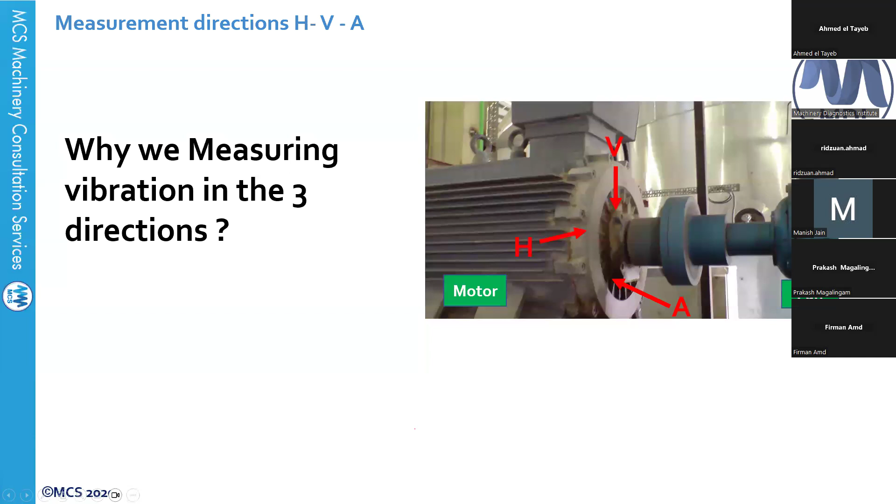I'm living in Australia for almost 12, 13 years now.

I have two companies: one called MCS, Machinery Consultation and Services, which is the company for machinery consultation, and I have 4 guys working with me in the team. I also have another company called MDI, Machinery Diagnostics Institute, which is the company for training.

MDI is a training institute. We are training partners with Mobius Institute, with ICML for lubrication, with Infraspection for thermal imaging, and we have our own turbomachinery courses: turbomachinery analysis, advanced turbomachinery analysis, advanced machinery balancing, and turbomachinery data collection.

This is the course package we are introducing. We plan to make these free workshop sessions to talk about several topics in condition monitoring. We'll start with vibration analysis, one session every month, short but effective.

I'm pretty sure you will like it. We're going to talk about turbomachine vibration analysis, data collection, fault analysis, how to make a vibration analysis report, thermal imaging, oil analysis, on-site balancing, laser alignment, and asset reliability. Many topics over this year, one session every month.

At the end of the session, during the whole session, it will be recorded, so we put it on the YouTube channel so everyone can see it later if they couldn't attend the session.

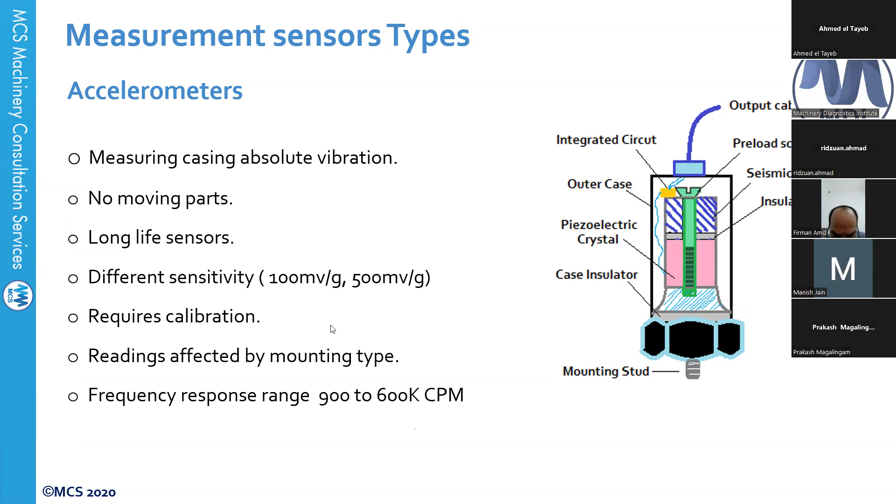Reading of this sensor is affected by mounting type, and we have frequency response between 900 to 600K CPM. Those accelerometers measure high frequency vibration; you can have flat or 2-pole base magnet, single and tri-ax accelerometer. External power is required for the accelerometer, not like the transducer. Temperature is limited to 250 Fahrenheit, and it's easy to attach for routine vibration data collection. Reading can be integrated to velocity and double integrated to displacement.

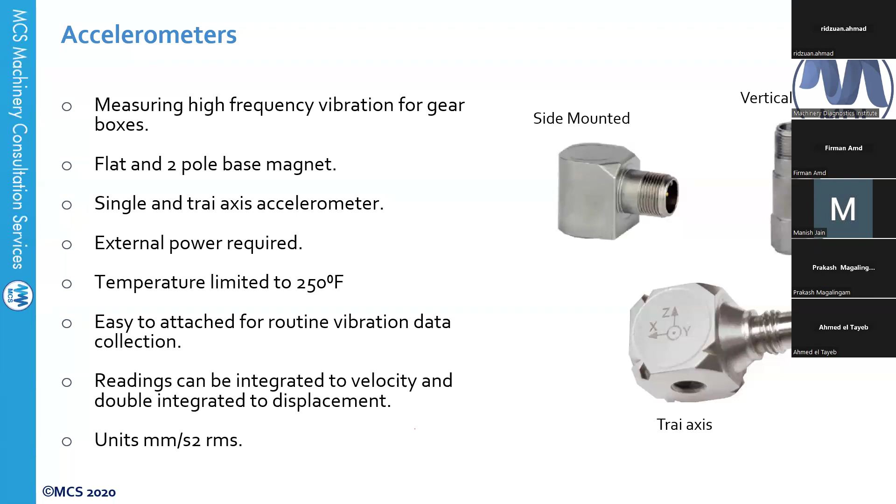We have many mounting methods when we're trying to take vibration data using those accelerometers.

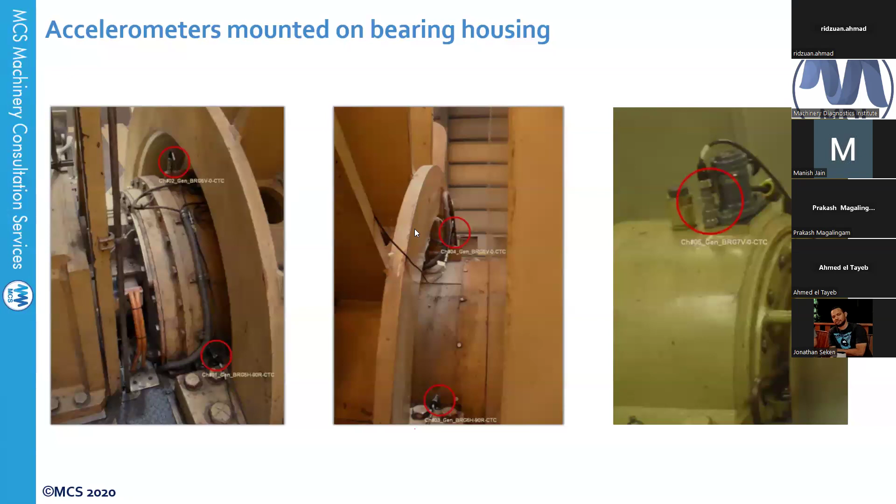So you have here, this is the steam turbine casing, and as you can see, you have the accelerometer on the casing. So you can collect vibration data from the casing of bearings using those accelerometers. You have the velocity transducer. This is the second type of vibration sensors, and this can measure the casing absolute vibration.

It contains moving parts. As you can see, there is a spring and coil and magnet. No external power is required because the movement of the coil inside the magnet by itself will generate the power required to be converted later on from analog to digital reading so you can get the vibration data. It has short lifetime because of the mechanical parts inside the sensor.

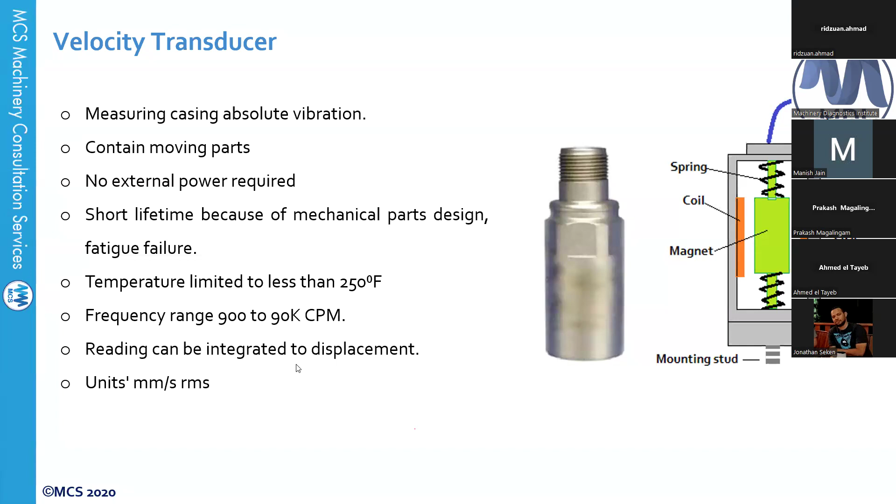Temperature limited to less than 250 Fahrenheit. Frequency response range between 900 to 90,000 CPM. Reading can be integrated to displacement from the velocity. The third type of sensors we have is the proximity probe. Proximity probes, or proximity transducers, or non-contact eddy current.

It uses a radio frequency electromagnetic field to measure the distance between the non-contacting probe tip and the observed target. Measuring shaft position within the clearance of fluid film bearing, you get DC voltage. And measuring the shaft vibration amplitude by AC voltage. So with proximity probe, you get two types of voltage, AC and DC.

DC will tell you the shaft position inside, for example, the journal bearing, or for the axial movement. And the AC will give you the shaft dynamic vibration in microns or mils peak to peak. And mostly it's used in steam turbine, gas turbine, any machine with journal bearing. It doesn't have moving parts.

You have sensor sensitivity about 200 millivolt per mil or 7.87 volt per millimeter. And this is the sensitivity for the sensors especially used in measuring vibration data. Those sensitivities can be different with different sensor types, and you'll have different linear ranges as well. And it can have several applications, like measuring the eccentricity, the speed, and the differential expansion.

So those sensors have different sensitivities with different sizes, with different linear ranges, and can be used in different applications on turbine. But the most common one we're talking about is the 200 millivolt per mil or 7.87 volt per millimeter. This is the one which is used in radial vibration data collection.

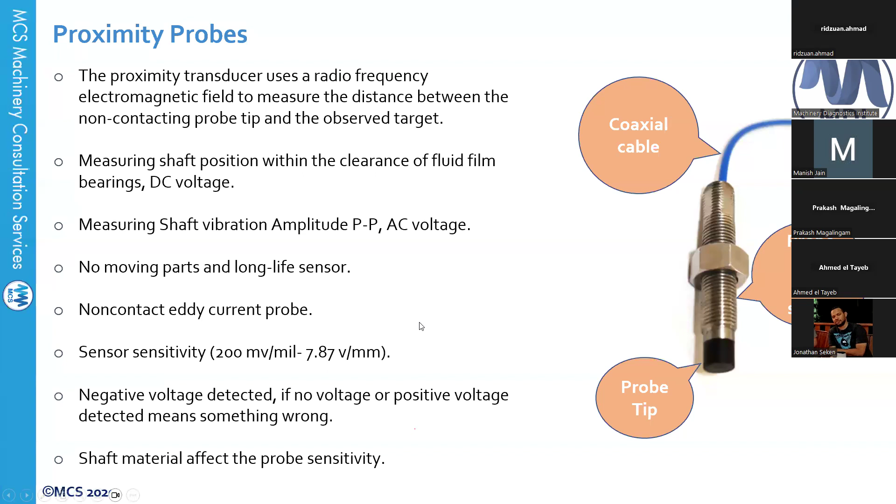If you get negative voltage detected, this is the normal voltage you can detect from the proximity probes. If no voltage or positive voltage, this will mean there is something wrong, and shaft material will affect the probe sensitivity. As I mentioned, those proximity probes will give you DC and AC voltage data, and the DC voltage is directly proportional to the gap or the distance between the probe tip and the shaft surface.

When you have larger distance between the probe tip and the shaft surface, this means you have lower voltage value. And when the shaft is closer, with a smaller gap, this means you have higher voltage value. So if you look here from this plot, you have 2, 4, 6, 8, 10, 12.

This is the voltage value. Remember that the output voltage value was minus DC. So which number is bigger, minus 2 or minus 24? Definitely minus 2 is larger than minus 24. So when you have minus 2, this means you have larger voltage value and the gap is smaller. When you have lower voltage value, this means you have higher gap.

And this is almost the midpoint here, around 10, the midpoint of the linear range. The linear range for proximity probe at 7.87 volt per millimeter as sensitivity is between minus 2 to minus 18, minus 20. That's why when you gap the proximity probe, you put it around between minus 8 to minus 10 or minus 11. This is the midpoint of the linear range. So you can ensure that when the shaft is moving away from the probe or near to the probe, you will still be in the linear range of the proximity probe.

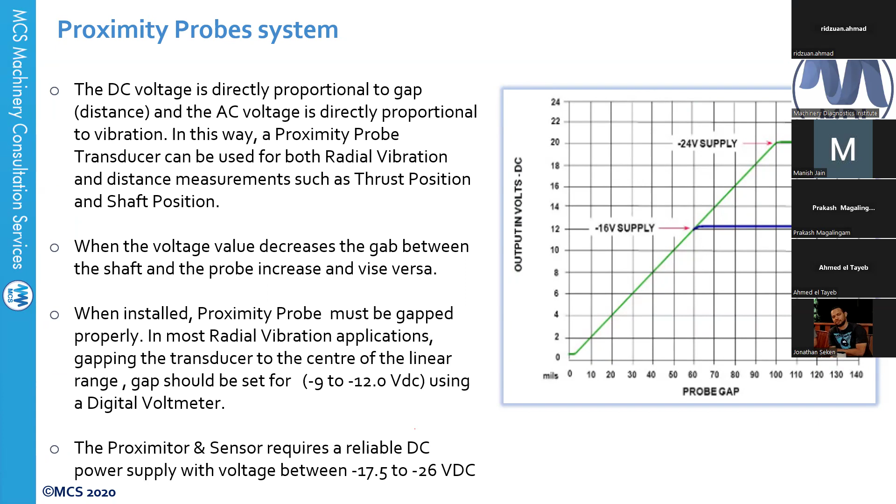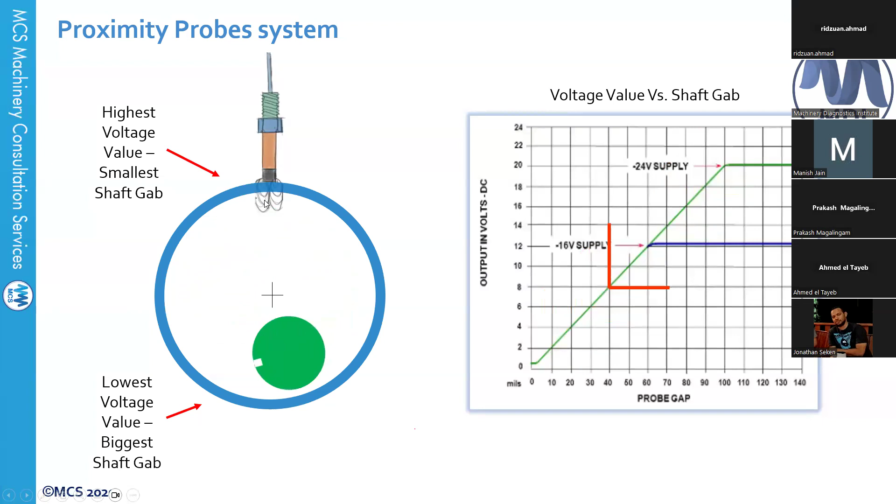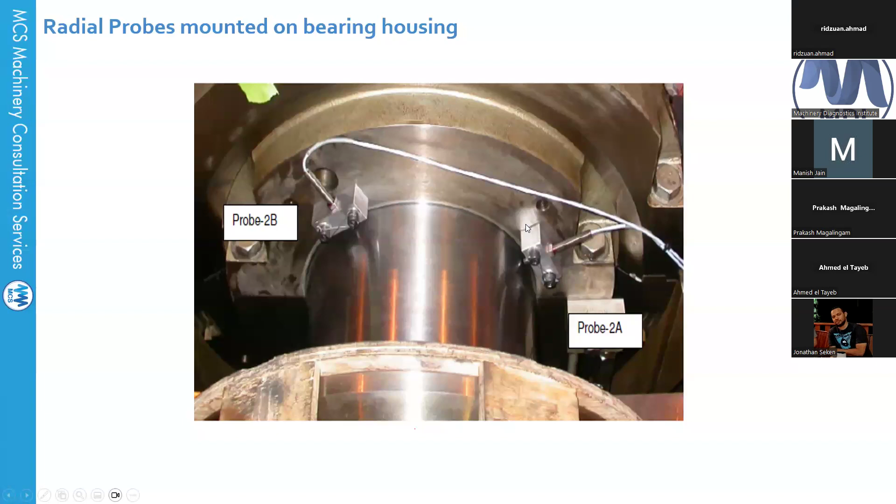As you can see here, when the rotor starts to be away from the proximity probe, you will get the lowest voltage value and the biggest shaft gap. And here you will get the highest voltage value and the smallest shaft gap. This is proximity probes, and this is what we call internal mounting. There are two types of mounting: internal mounting and external mounting. These two proximity probes are mounted internally over the shaft for a steam turbine.

Prior to talking about vibration measurement, we need to understand why we are going to measure, what we are going to measure, and how we are going to measure it. Why? What information we are trying to find, what the appropriate data acquisition parameters are, what sensor we use, how do we mount it, where do we mount it, and why we collect vibration data in horizontal, vertical, and axial.

Many times in the training courses I'm delivering, I ask what is the reason we're measuring horizontal, vertical, axial? And I get the answer: because when you measure in horizontal, vertical and axial, you will be able to detect different types of faults. Some faults we see in horizontal, some in vertical, some faults will appear with higher level or more dominance in this direction. But this is not the right answer. We're not measuring in 3 directions because different faults appear in different directions.

The reason we're measuring in different directions on the machine is because the machine response is different between horizontal, vertical and axial, because the stiffness is different between horizontal, vertical and axial. That's why we have imbalance with higher amplitude in the horizontal direction for most machines, because the response we get in the horizontal direction is higher than what we get from the vertical direction. Why is that? Because the stiffness is equal to the load per unit deflection.

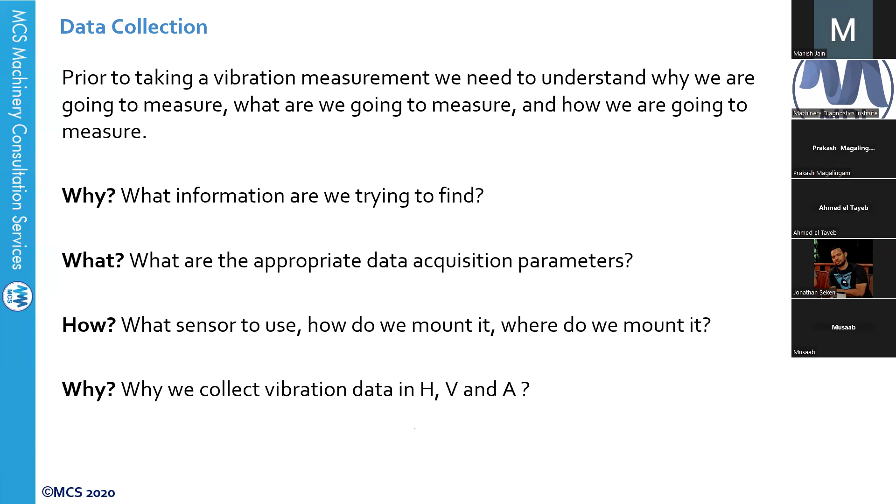So if you say, I have a vibration problem in bearing number 2, if I don't know that bearing number 2 is the drive end bearing of the motor, I will not be able to understand the problem. You can use this method, but you must put the machine photo. I don't like to use it because it's not easy. Every time you use it in any report, you will have to put a photo and mark all the points. That's more work to reach this result.

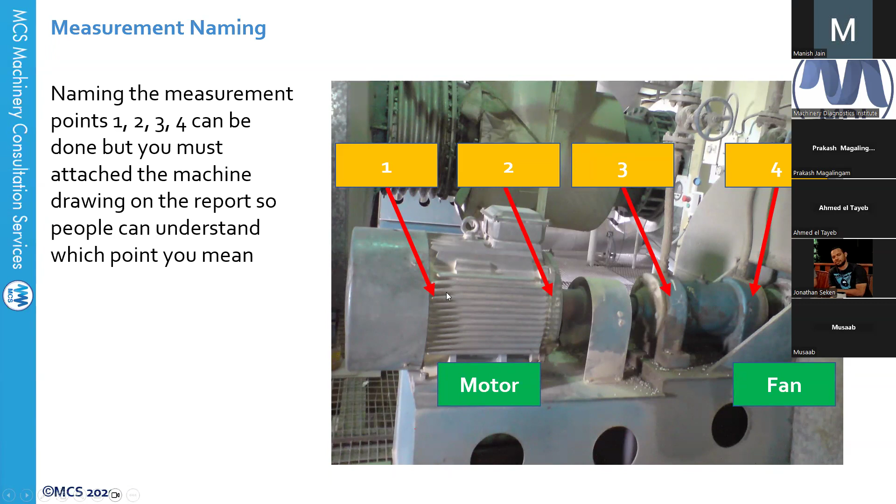However, you can name it MNDE or MDE, FDE or FNDE: motor non-drive end, motor drive end, fan drive end, and fan non-drive end. So this is a fan. You have the motor, coupling, and 2 bearings for the fan. This is the motor drive end. So if I told you there is a bearing fault in the motor drive end, you'll understand that I'm talking about this bearing.

But if I told you bearing number 2, bearing number 3 without a drawing, you will not understand what I mean. So you can name it motor non-drive end, motor drive end, fan drive end, and fan non-drive end. This is the motor and this is your fan.

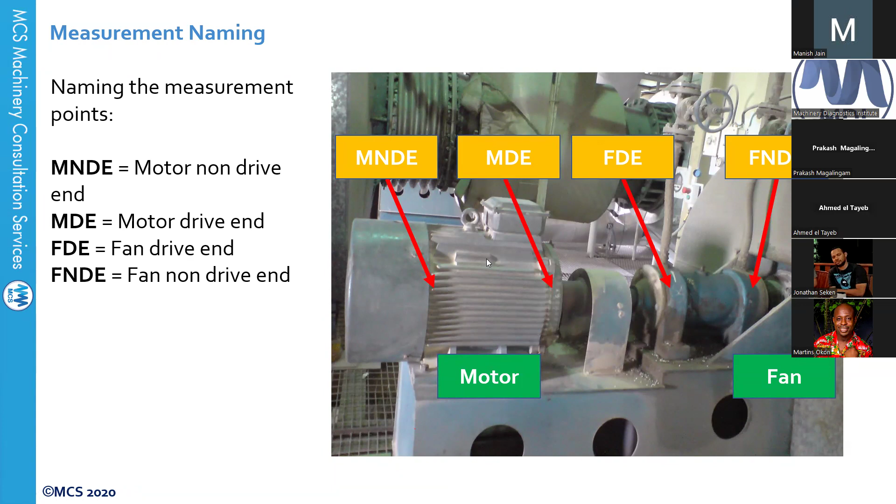You can also name it another way: motor outboard bearing, motor inboard bearing, fan inboard bearing, or fan outboard bearing. So this is also a good terminology to name your machine with. And this will enable you to understand. If I told you there is a problem in the drive end or the non-drive end, you will understand what I'm talking about.

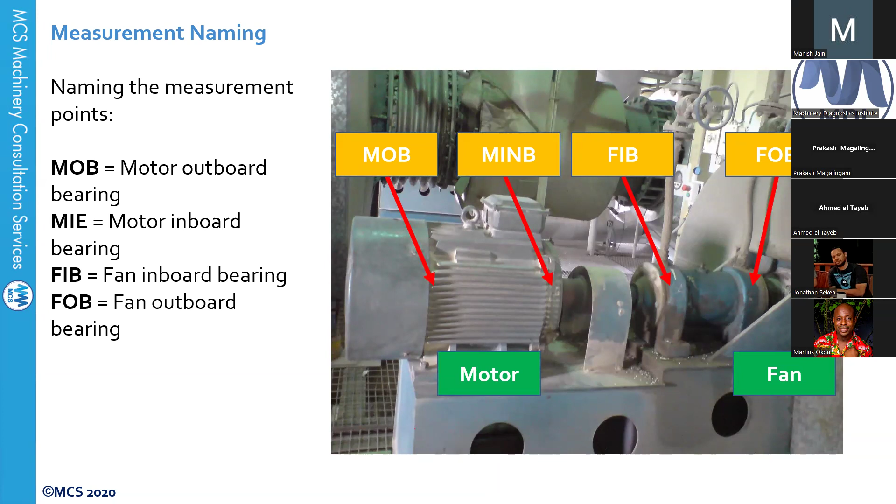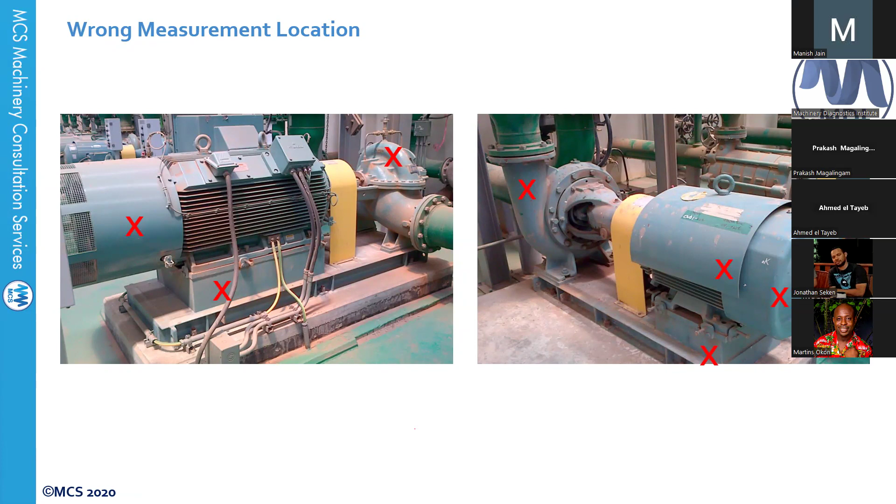Okay. So for the point of measurement, you cannot just measure at any location. If you measure here on the cooling fan casing, that will give you a false reading. It is hollow from inside. You cannot measure on the base. You cannot measure on the casing of the pump or the volute. You cannot measure on this cover from rain. You cannot measure on the cooling fan cover. You cannot measure on the base.

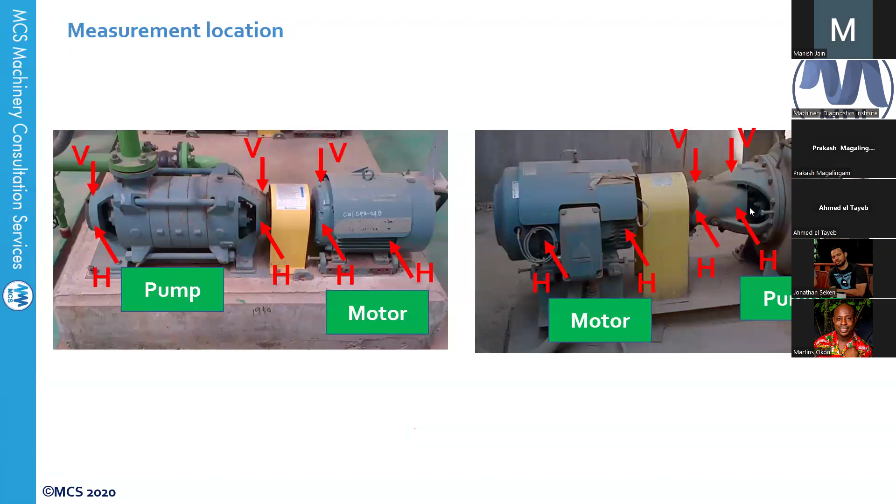Where to measure? If you have a motor and pump, this is the best point. Horizontal, vertical; you don't have an axial axis here. Horizontal, vertical; you don't have axial here. Horizontal, vertical; yes, you can get axial on that one. Horizontal for the non-drive end and drive end, and 2 horizontal and vertical for the pump. If you can put your sensor on the motor feet here, you can take some reading. Sometimes if you have a side exit, you can put it here, but be careful if there are any rotating parts.

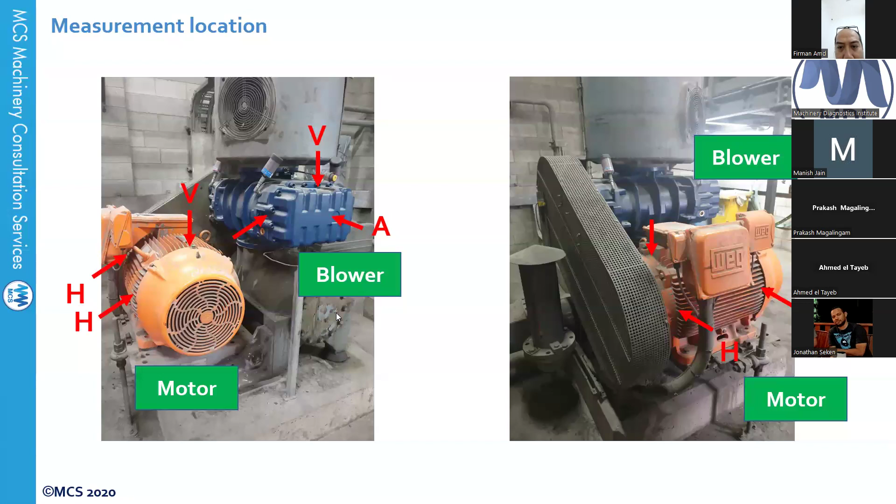So this is something you can take. For a vertical machine, horizontal and vertical is not clear. This is your horizontal direction, vertical direction, horizontal and vertical. If you choose to keep this one horizontal, keep it horizontal every time you take the measurement. And if you choose this direction to be your vertical, keep it vertical every time you take the measurement.

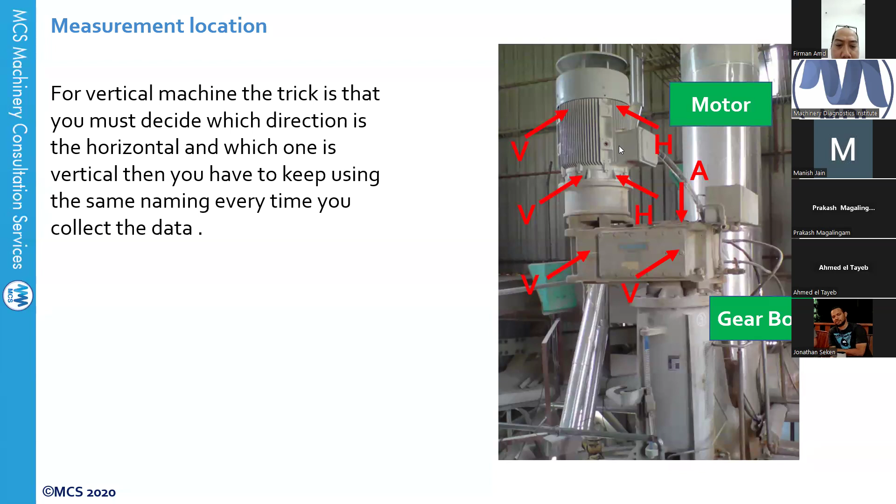You cannot swap them. You cannot measure here this time and name it in your software horizontal and this one name it vertical. If you keep this direction of measurement horizontal, keep it like this. You can even mark it. You can put mounting pads, and these mounting pads have the direction stamped on them, so you will not get confused. As you can see here, this is a couple of pumps.

I tried to put many types of machines so I can give you the feeling you have on site. Like horizontal, vertical, horizontal, vertical. If you have a side exit sensor and you can squeeze this one to put it somewhere here, that's not bad, it can be done. If you can have a side exit sensor to squeeze it here for axial, that's not bad. If you have side exit to put it here to get your axial, okay, better than nothing. And you see, get your axial, horizontal, vertical. If you can squeeze something here, okay, that's fine. So you can get this measurement.

As you can see here also, horizontal, vertical direction, this is your axial, horizontal, vertical, this is for the pump. This is a motor, direct coupled with a small gearbox, coupling, and this is a hydraulic pump. With this small motor, you can take horizontal, vertical for the non-drive end, horizontal and vertical for the drive end. However, because this motor is small, you don't need to take measurements for both bearings. One measurement would be enough, because the motor size is too small. If you have a small motor, you don't need to take readings in the non-drive end and the drive end.

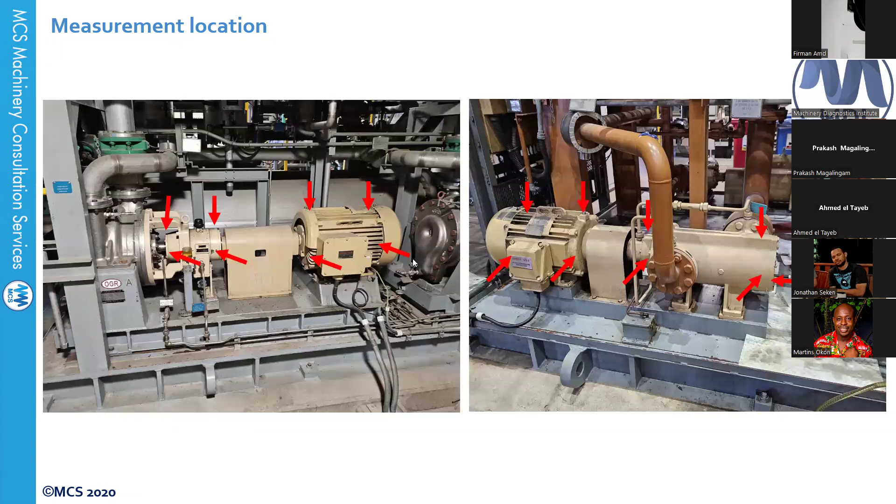However, by small motor, we're not talking about small by kilowatt, we're talking about small by distance. Like if the total length of the motor is less than 70 centimeters, like this one, one measurement would be fine. But if it is a long motor, like for example that one, this is a longer one, you need to take the non-drive end and the drive end. It's not about how many kilowatts the motor is, it's about how long it is.

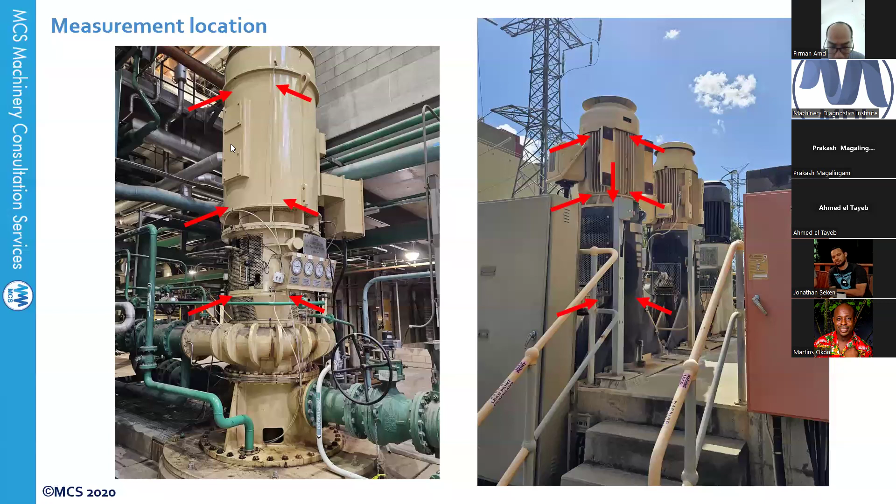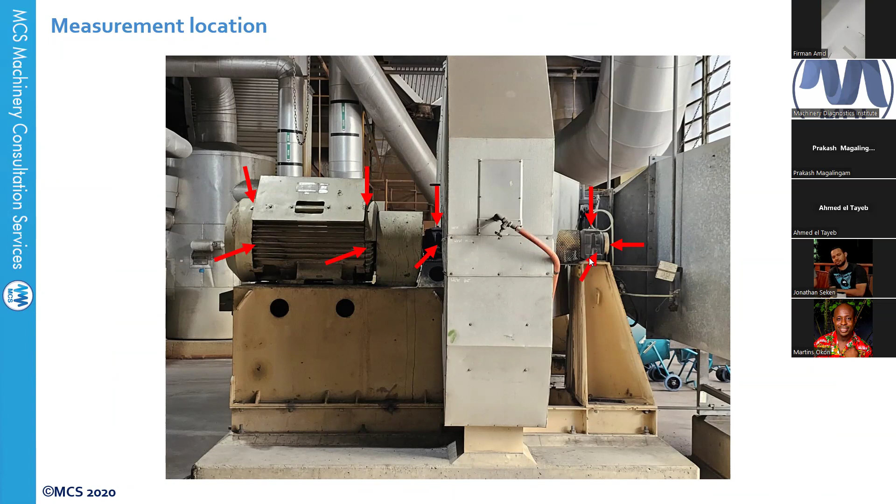So if we choose this as your horizontal and this as the vertical, keep them horizontal and vertical every time. As you see, with this motor, you cannot take only the middle, for example, because this is a long motor. It has a longer length, so you need to take in the non-drive end and in the drive end. This is the fan drive end, and this is the fan non-drive end, and this is a center hung fan. Again, with this one, horizontal, vertical, horizontal, vertical. If I don't have access here for axial measurement, I will not be able to take it.

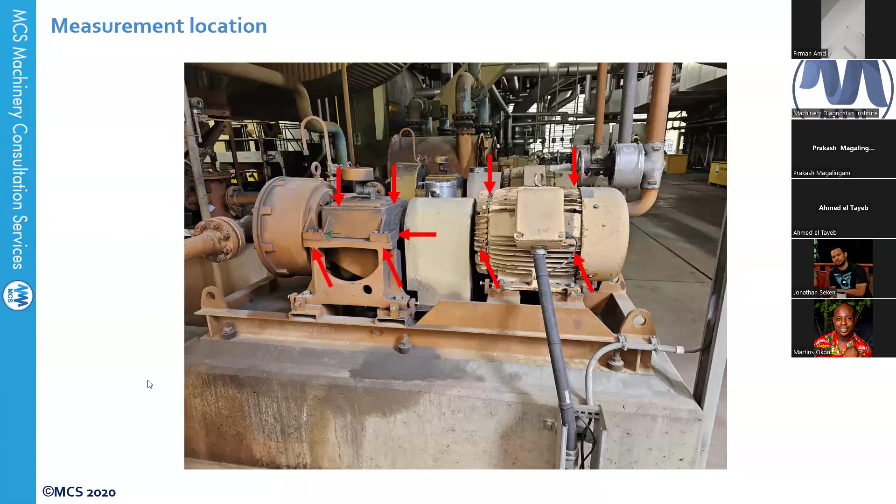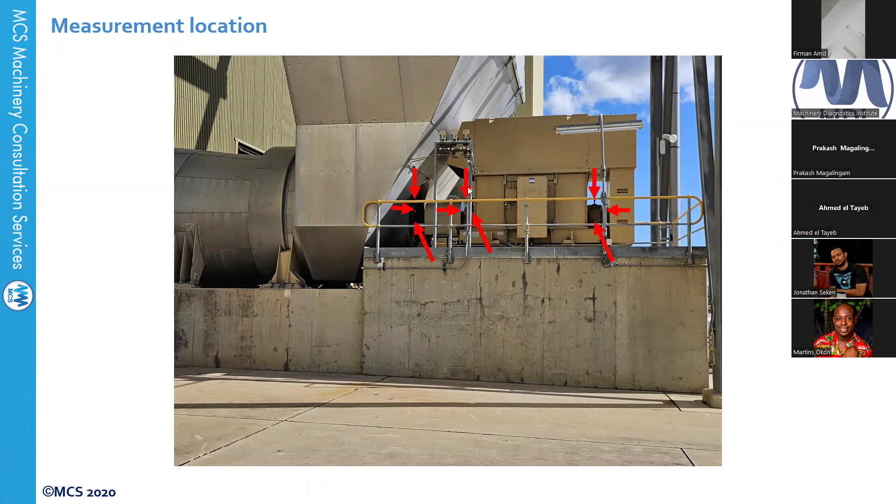Again, you will take the measurement in the 3 directions. With this pump, you can take the axial from here. It will not be bad. It gives you an indication, better than nothing. And this is your drive end.

How do you determine the best vibration monitoring interval so as not to miss catching potential issues early to initiate maintenance? Very good question, Martins, but this is not about this lecture. This is the last one about asset reliability.

But the short and easy answer is that you must do a criticality risk assessment. Based on the criticality risk assessment for your equipment, you will be able to choose the frequency of the measurement: how this equipment will affect the plant, the production, the environment, the human factor, the breakdown, the secondary damage, the spare parts or inventory you have. There are many factors, and then you can rank this with numbers.

And if it gives you a high number, for example, I'm trying to explain it quickly, a high ranking value, then it must have a shorter interval for the measurement. But if it doesn't have an effect on the environment or the production, has less effect on the spare parts, it's a small motor, not expensive, in some cases you can just run it to failure, because it's not worth wasting your time taking measurements on this machine.

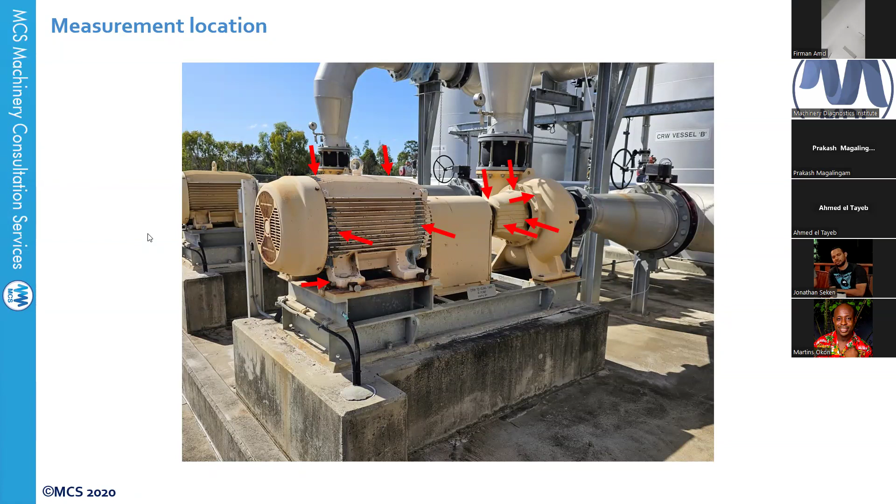As you can see here, horizontal, vertical, horizontal, vertical. Some motors, by the way, are not made of steel. Your magnet will not be able to stick to the casing. So what you do is hold it with your hand, as strongly as you can. Don't make things very complex. Don't say, okay, the sensor is not sticking, the magnet's not sticking. Just hold it strongly with your hand.

And what else to do? Try to get mounting pads and stick them with glue or adhesive or two-part material onto your motor. Then on the next measurement, you will be able to get good and reliable vibration data. And the most important thing is the repeatability and consistency of the measurement.

In case a vibration sensor is faulty, what other protection can help trip the machine to prevent a breakdown? If the vibration sensor is faulty, you cannot run the machine with it. It must be replaced. Especially if you have steam turbines, gas turbines or high-speed machines running with proximity probes and they are faulty, it's not safe at all to run without a vibration protection system. You need to have a protection system for this machine.

I once went to collect some vibration data on an old steam turbine. It didn't have proximity probes and it didn't have a protection system. They had one guy with a vibration data collector who collected vibration data on this turbine from time to time, only from the casing. And we got severe damage on this machine. Then I went to the site and installed a proper proximity probe system for the turbine, connected to a junction box so we can take the data from BNC, and we put in a protection system connected to the DCS so we can trend.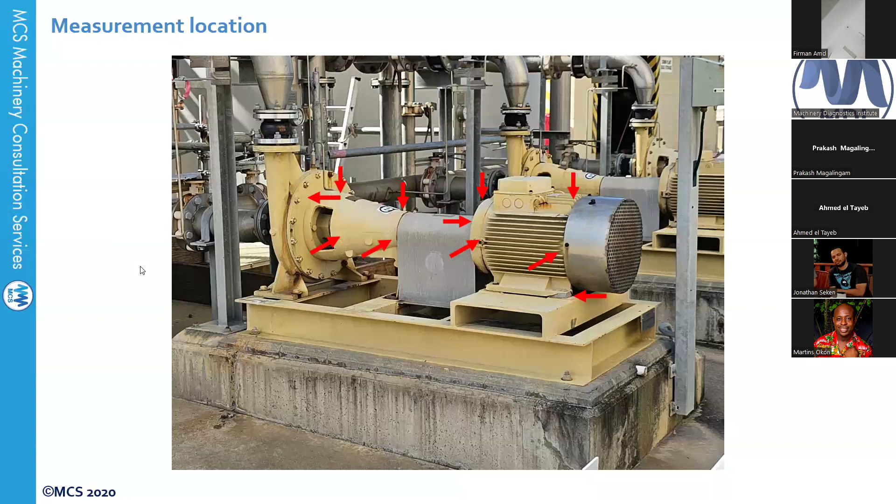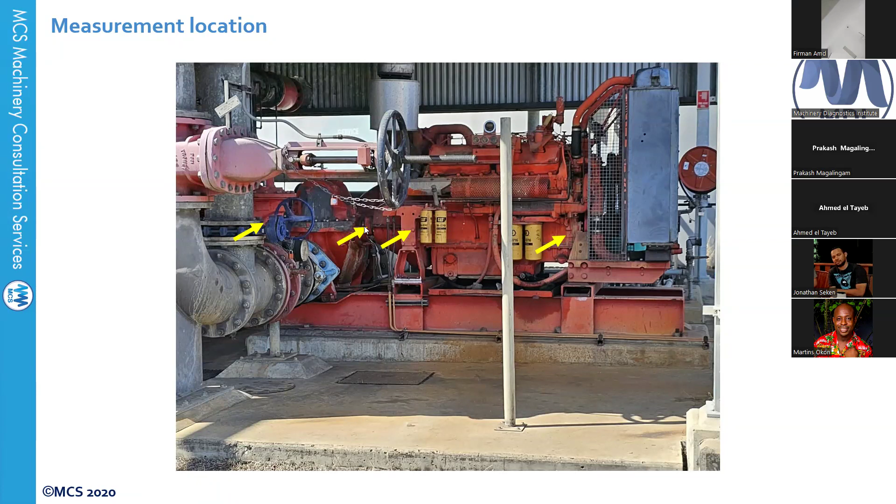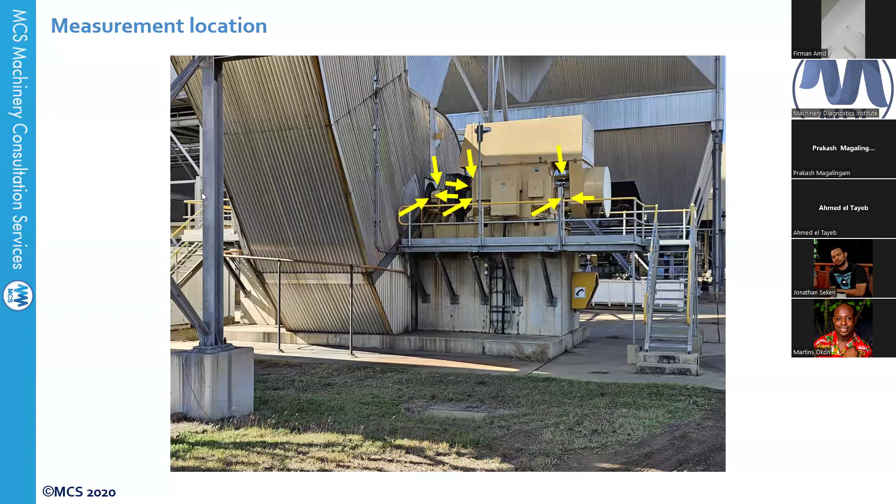So there is no middle answer for these situations. You must have a good protection system for your machine. You cannot say I will depend only on temperature. No. For diesel engines, like this diesel engine for a firefighting pump, you can do the measurement in this direction, and this is the pump: horizontal, horizontal, vertical, and vertical. This is an ID fan. You have the motor non-drive end, motor drive end, the fan drive end, and the fan non-drive end from the other side, and we will take vibration in the 3 directions.

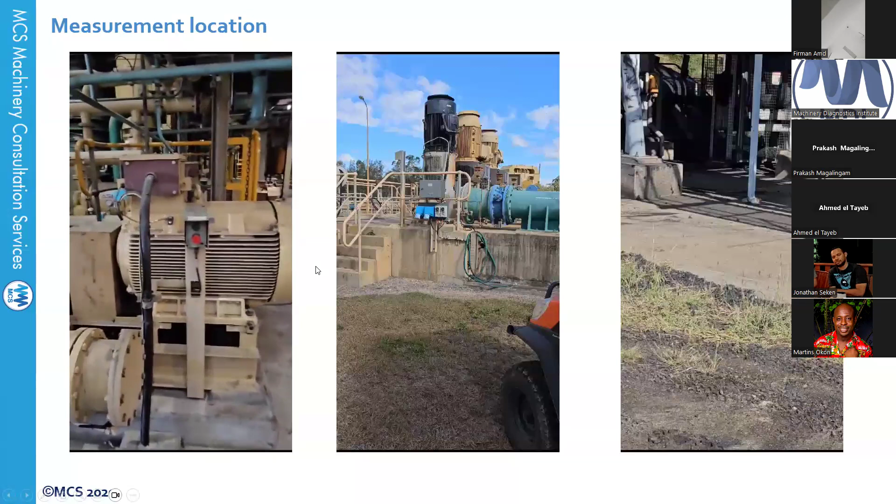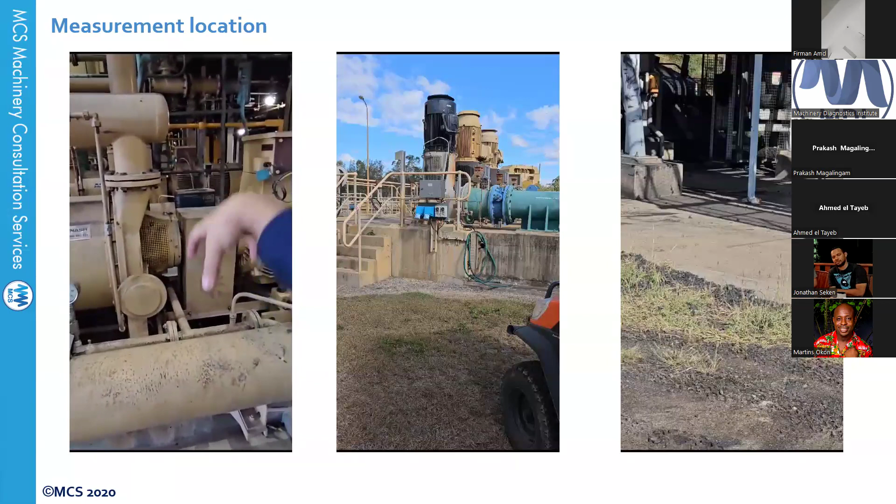Let's have a look at that one. This is a motor driving an air extraction pump. With this video, I will show you how to take the vibration measurement. This is the non-drive end side of the motor, and this is the drive end side of the motor. This is the pump drive end, and the other one is the pump non-drive end, and this is your coupling. Do we need 3 sensors for triaxial? No, just one sensor, which we call a triax accelerometer.

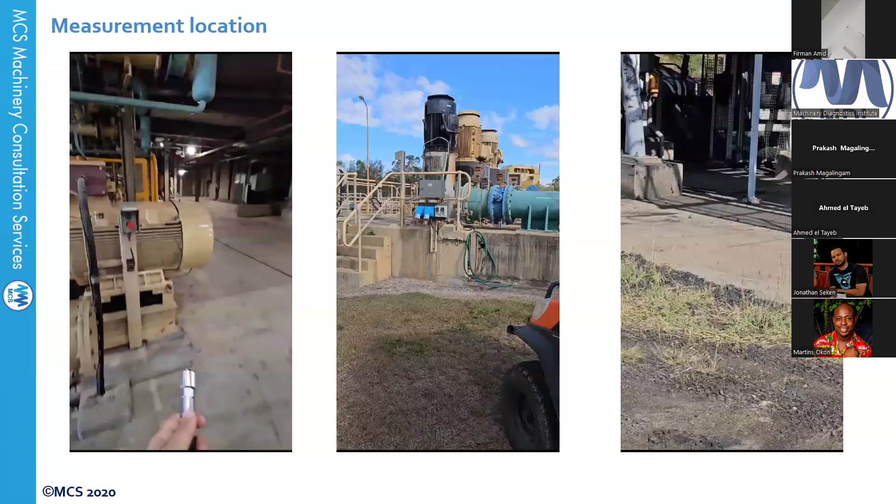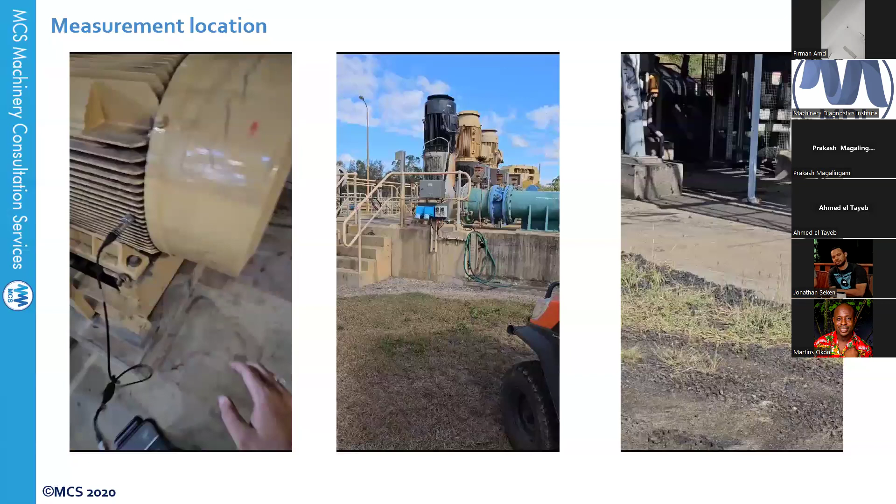So here you have your vibration sensor, and you go to the machine. You put the sensor with the magnet on the non-drive end, and then you open your analyzer. You find the route for the machine you're going to measure. You will have different routes in your data collector. You check the machine name to make sure you're measuring the right machine. You check if the machine is running or not. I checked from the back, this machine is not running, so I will not take a measurement for this one, and I will go to the next one.

And when you put the sensor on, try to put it on gently. The first time I put it on a bit hard, that's wrong. Try to roll it on and place it carefully so you will not cause damage to your sensor, and you will not have a ski slope in the measurement.

You will choose the machine, and then you will start to collect the vibration data. You will see, for example, the last survey, what was the vibration levels on the last measurement taken. You will click enter and start to collect the vibration data. Let's have a look, and then you will say overwrite the last one. I will tell him, for example, okay.

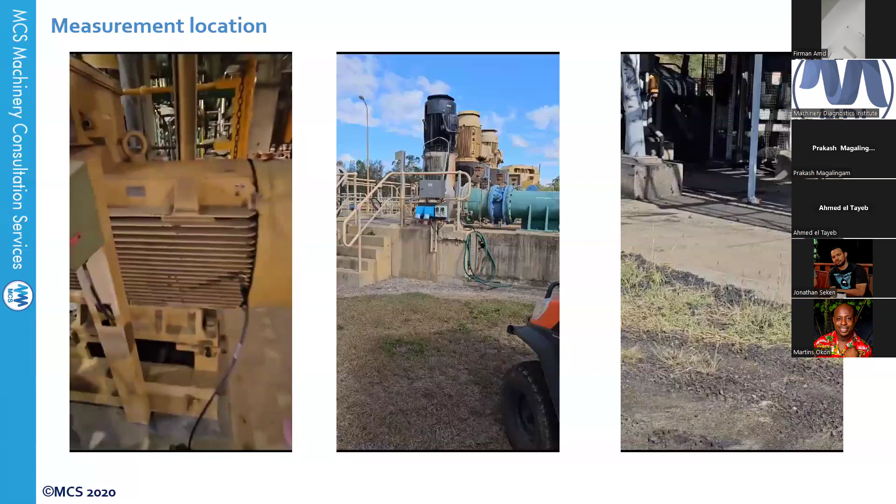Then it will start to acquire the vibration data, and it will be recorded. I take the horizontal measurement, and after it's been collected, we will go for the next direction. It can go automatically, or you can change this by hand. Then you go for, this is, for example, the axial, or you can take it from here.

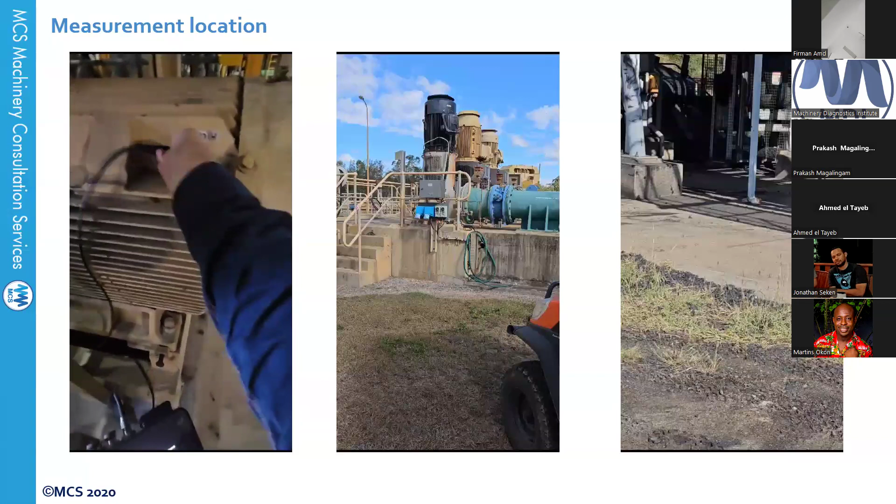This will be your axial measurement, or you can take it from here. If you don't have a good axial direction, try to find the best or easiest solution. Don't say no, I will not take it. At least you get some indication. And now we get the axial measurement. Don't say I don't have a measurement direction. No, you try to take the measurement if you can.

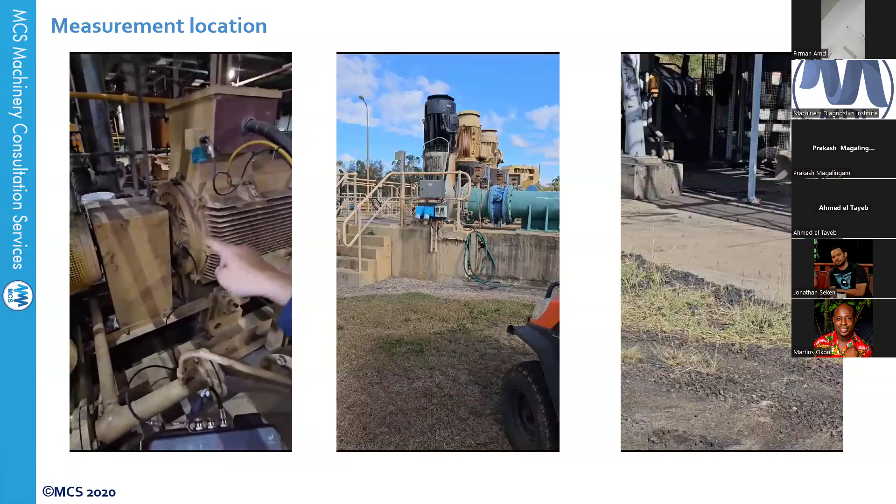And then you see here, when I put it, I roll it on, like I put the side of the magnet pole first, and then I roll it onto the next pole. As you can see here, this is the measurement for the drive end of the motor. You will collect the data.

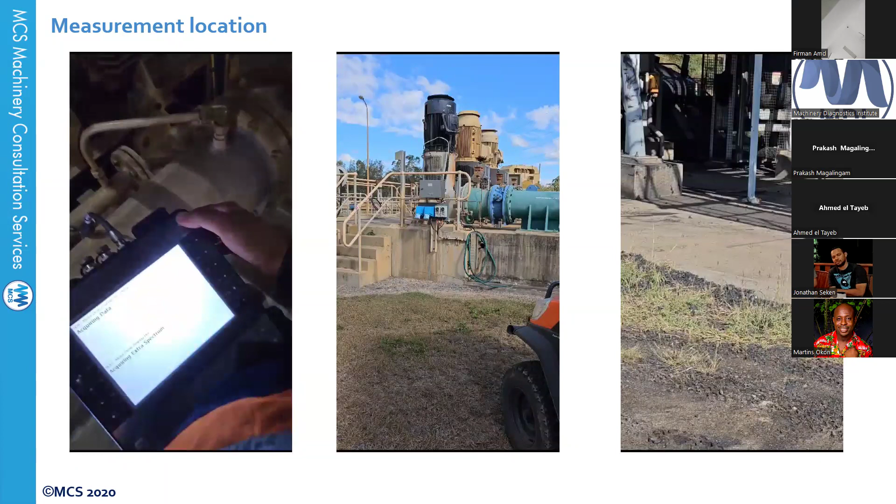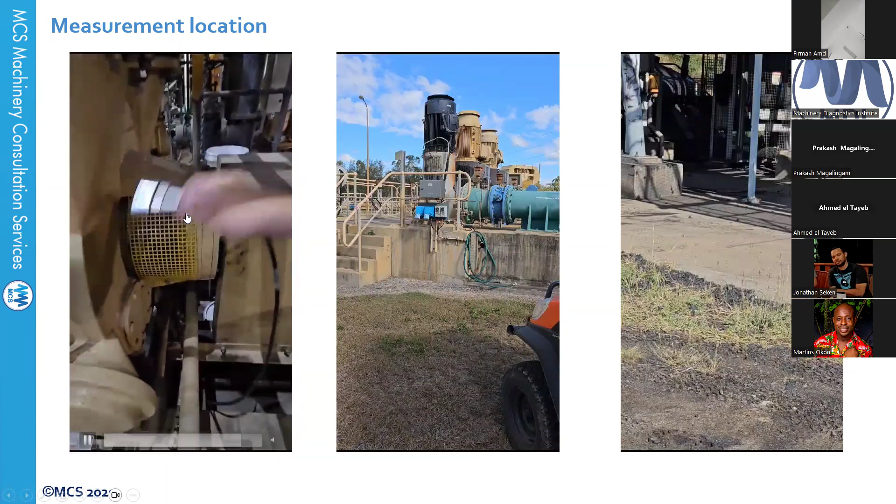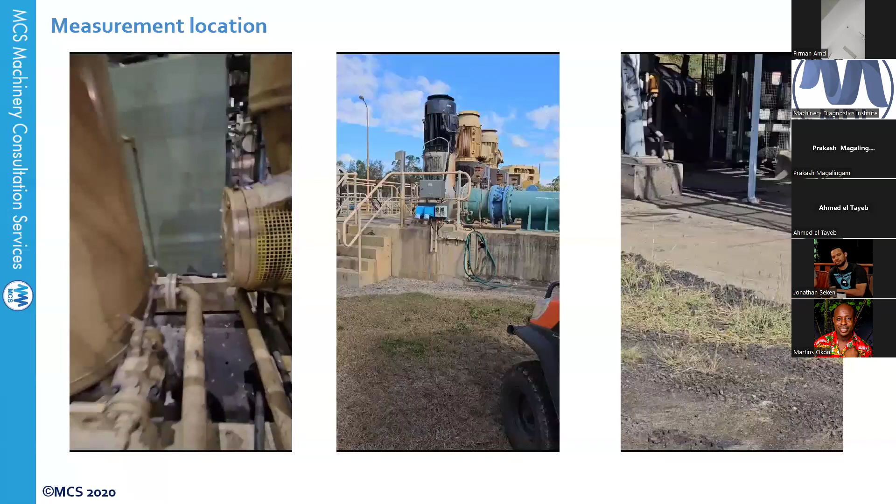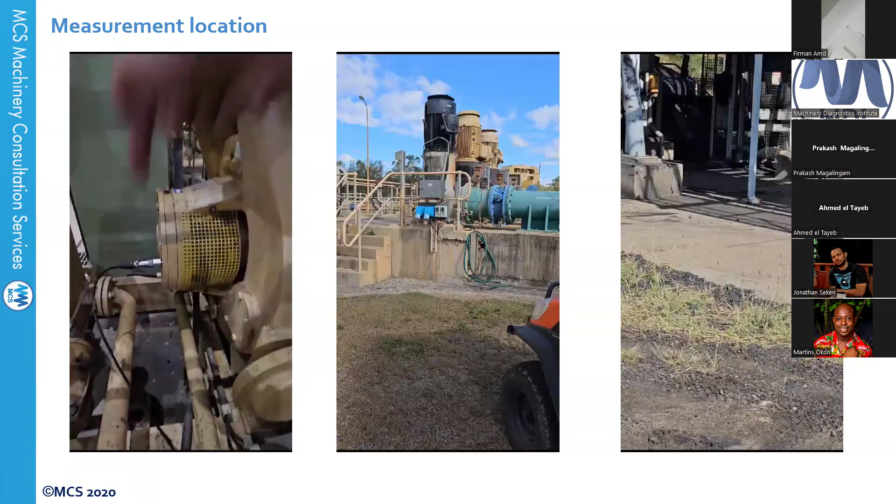Then you will get horizontal, vertical. Here I don't have axial, you see, so I will not take an axial measurement on this side. Then I'll go for the next one, take the horizontal measurement, and if I can have the vertical, I will take the vertical measurement, and again I will roll it on. As you can see, this is a curved surface, and because it's a curved surface, you see horizontal, vertical, and axial, so I will take 3 measurements.

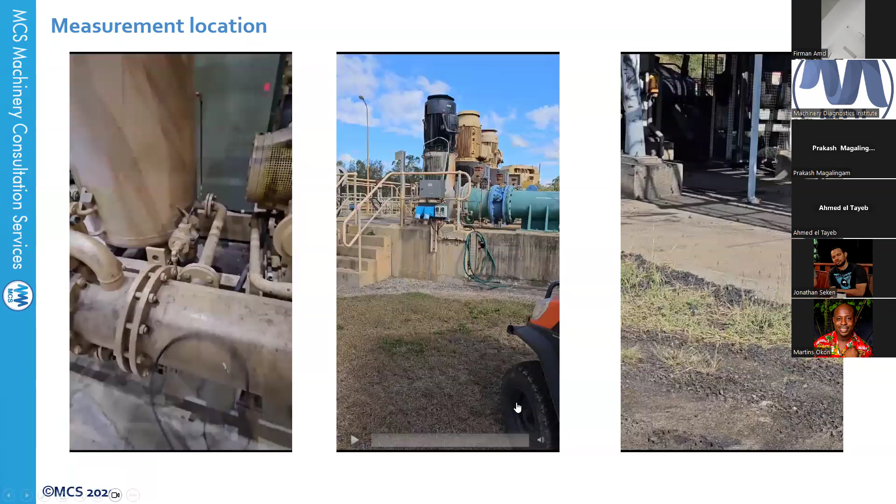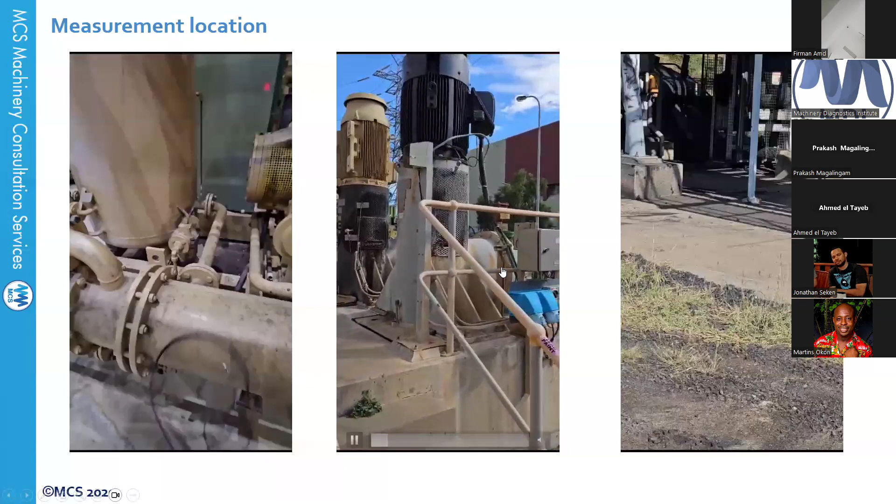Let's have a look here. This is for vertical machines. As you see, this is the line of the flow. So we can say that this here is your horizontal direction, which is the direction with the flow. And we will name this in our software or database as the horizontal direction.

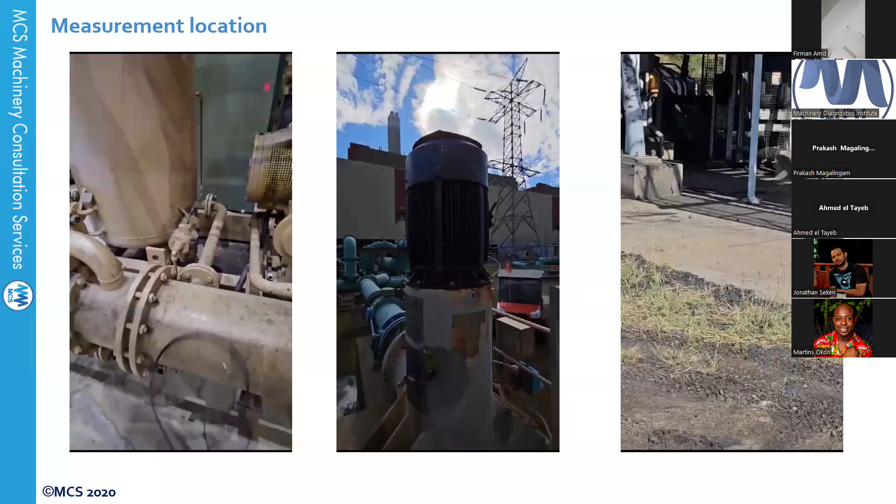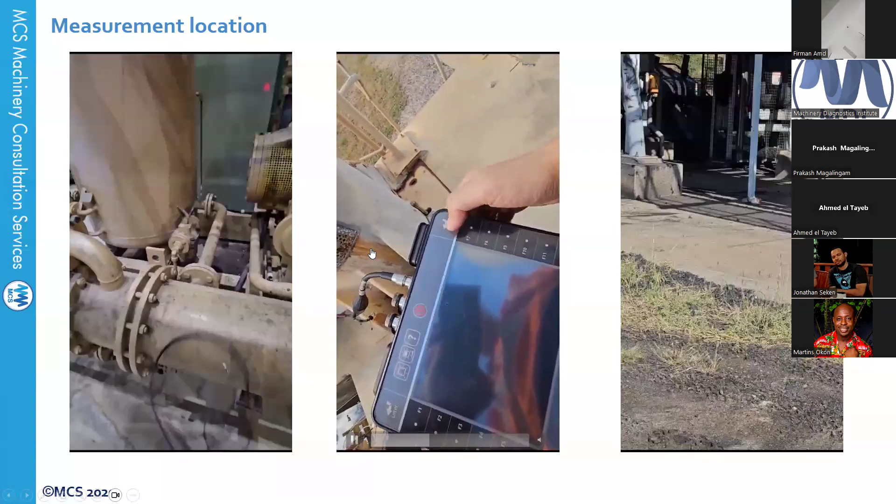So with these vertical machines, you see, we can say this is the vertical because it's 90 degrees perpendicular to the direction of the flow on the pipes. So this will be your vertical direction. And this one will be your horizontal direction because it's in line with the pipe. So you can name it this way.

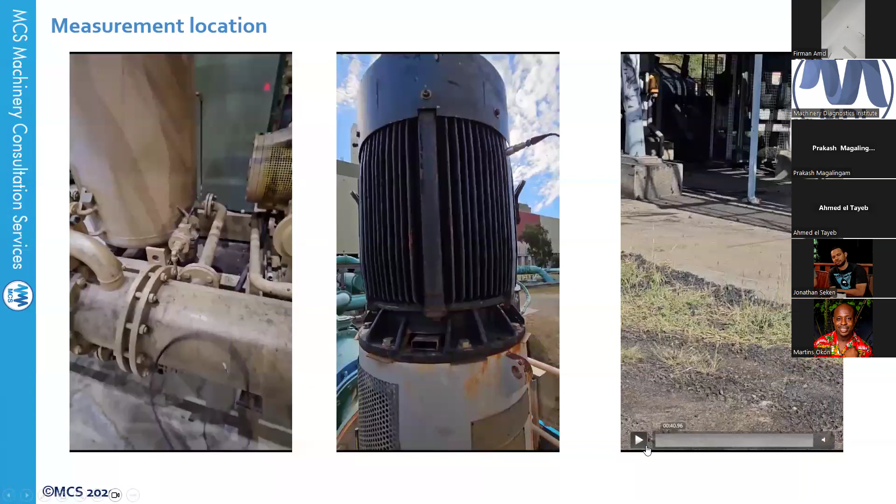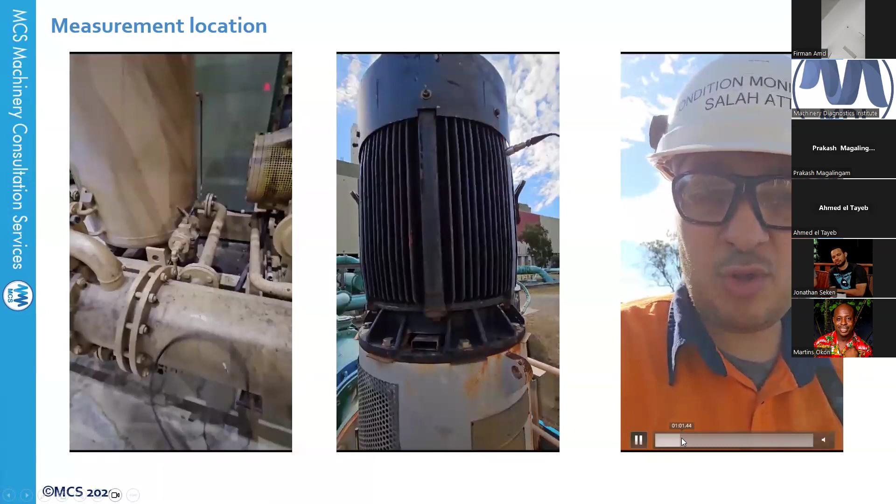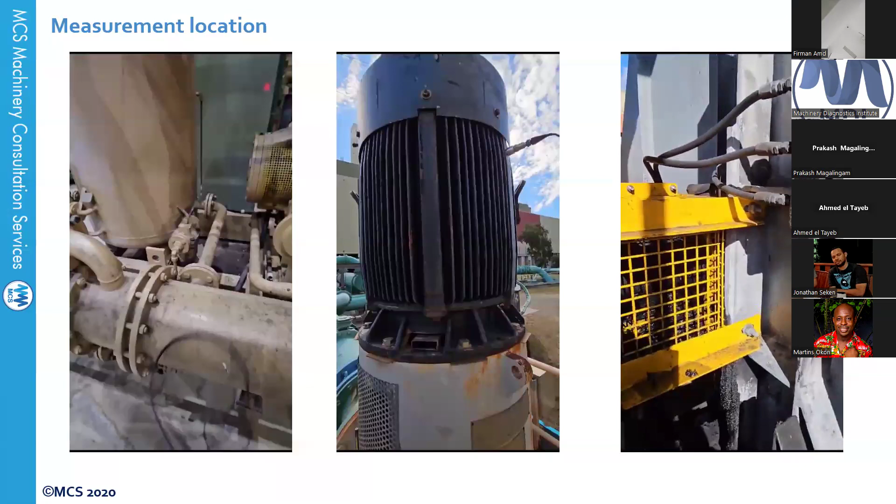And here, if you're going to take some measurement, for example, on motor and gearbox. Yep, this is your motor. And you have the coupling here, and you have the gearbox. So we'd like to take vibration measurement on that one. The motor, we know it, and the gearbox, you need to, of course, be careful about the rotating parts and the guards. This is the conveyor to transfer coal in a power station, and this is again the motor coupling.

So this is your vertical. You see, I put it over the fence. Sometimes the sensor will be a bit loose. If it is loose, try to hold it with your hand. The best way is if you have a mounting pad already stuck to the machine casing, but if you don't have one, don't say I will not measure it. I don't have axial - at least I will take some indication from here. This will be the horizontal for the drive end. It will give you some indication. And this will be your vertical direction.

Okay, if you don't have an axial direction here, sometimes you can put the sensor like this. If you don't have a way at all, you put the sensor by the side. This will give you a reading, here, this one in the middle. At least you get something.

Okay, but you need to always, when you take some vibration measurement, have a notebook with you. You can write if there is a leak, if there is noise, if there is high temperature, if the axial or some measurement has been taken with a special way.

Now you go for the gearbox. You can get the drive end in the horizontal direction from here. And then you have the low speed, the intermediate, the output, and you can name all those points here.

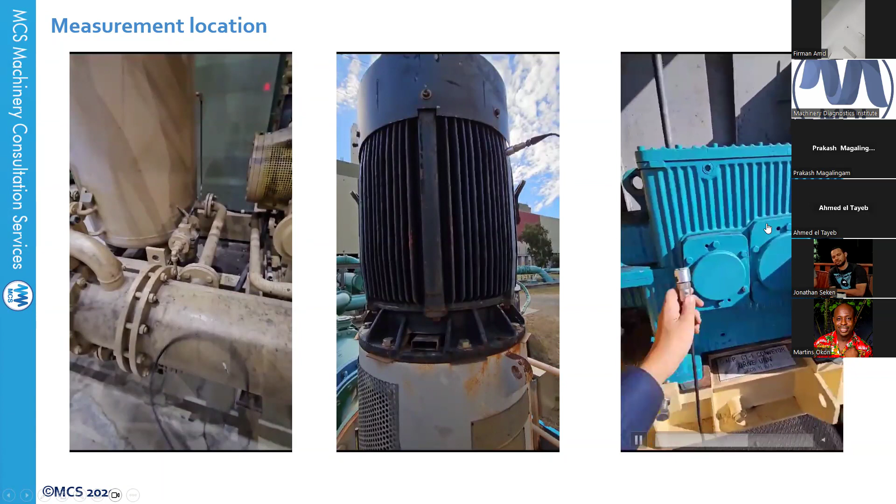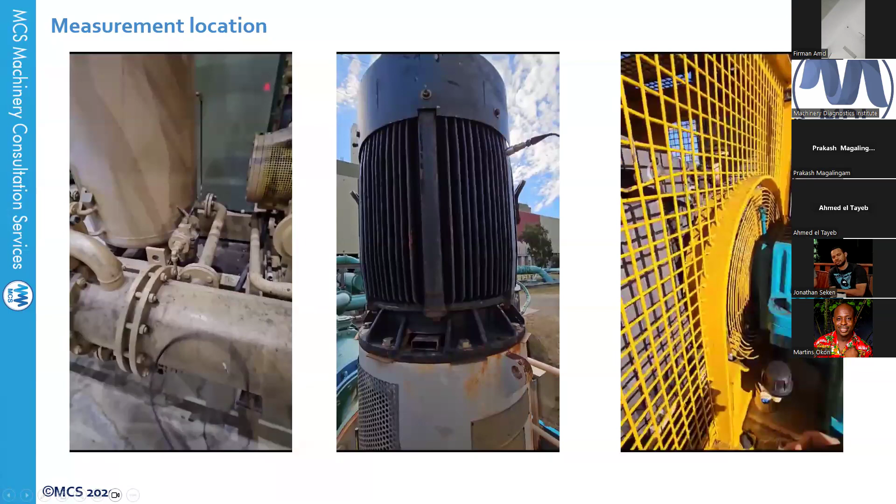As the input or high speed input, high speed output, intermediate speed input, intermediate speed output from the other side, output speed input, the output speed, the low speed input and the low speed output. So you can name it with the different speeds, like high speed input, high speed output, intermediate speed input, intermediate speed output, low speed input, and low speed output.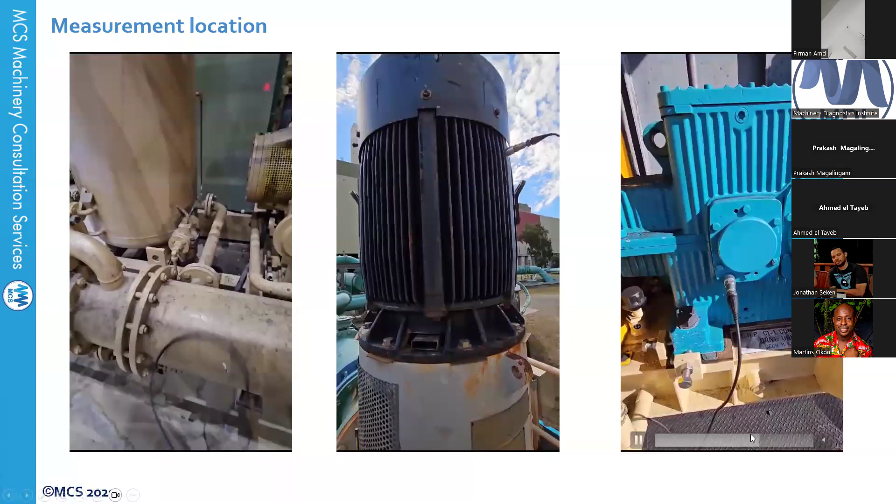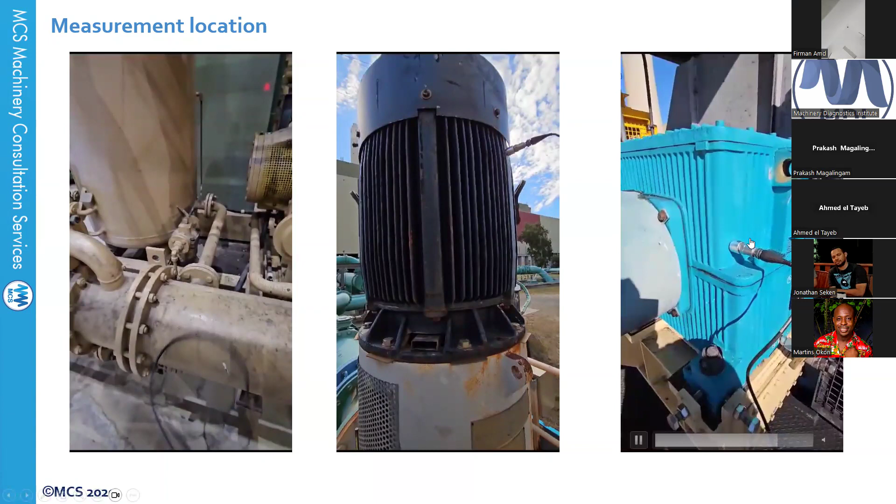And this is the low speed from the input, vertical and horizontal direction, as much as you can, to collect those vibration data.

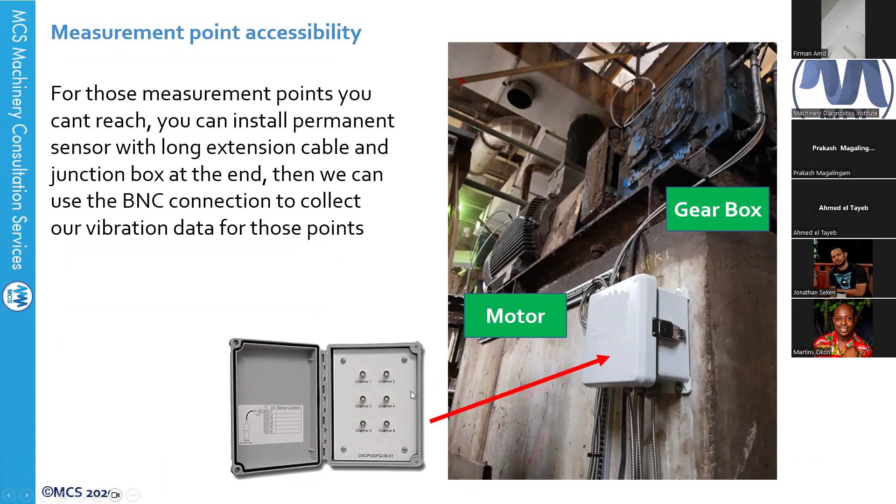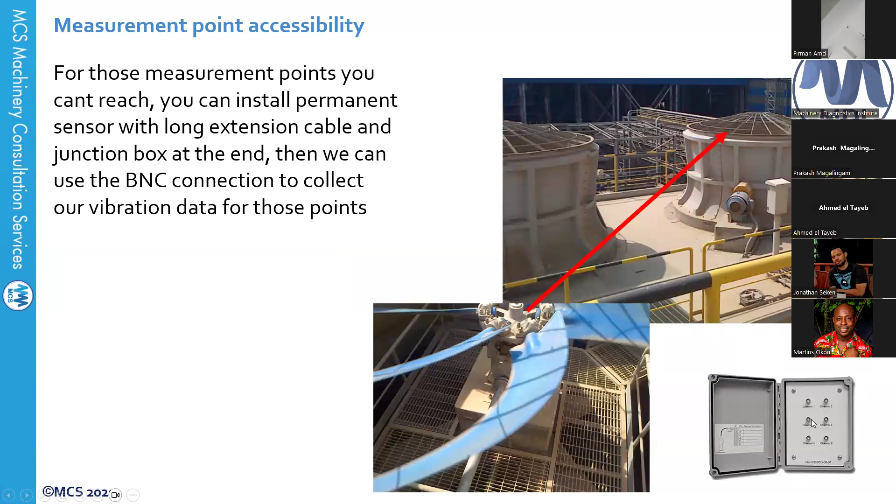In some situations, like this machine, it's very high and you don't have access to it. In this case, you must have permanent accelerometers mounted on your motor and gearbox, and you have a junction box with BNC connection to collect this vibration data. This sensor will be permanently mounted on your machine, especially for cooling towers.

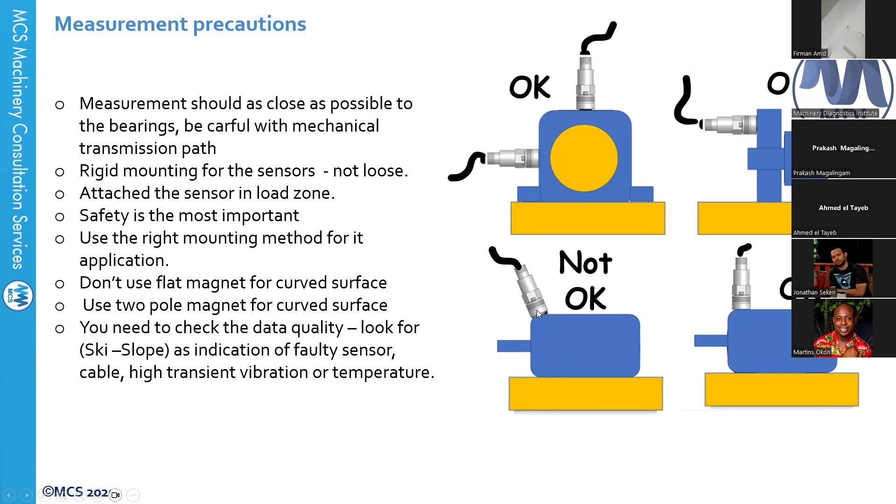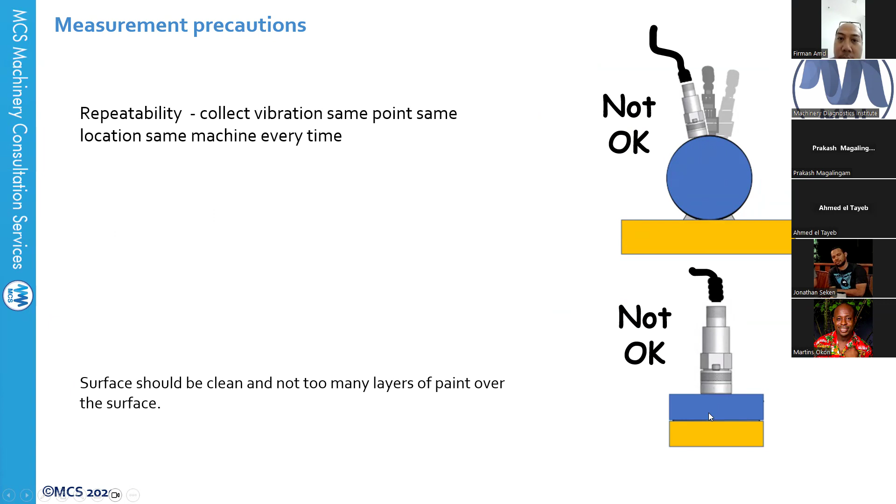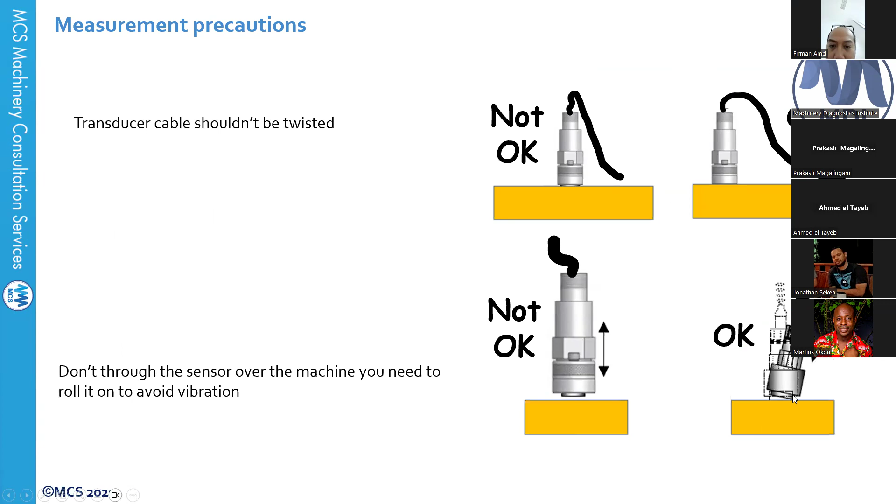You cannot have access, it's not safe, so you put it on the gearboxes and collect the vibration data from the junction box through the BNC connection. The sensor, you can put it in this position, that's okay. You cannot put it inclined like this. You cannot put your sensor like a flat magnet on a curved surface. It's not okay to have too many paint layers, and it's not okay to have the cable very squeezed like this. When you put the sensor, roll it on, don't hit the sensor over the surface. On a curved surface, if you use flat, the sensor will be loose, so use a 2-pole magnet for curved surfaces, or you can have a stud over the curved surface. That should be fine.

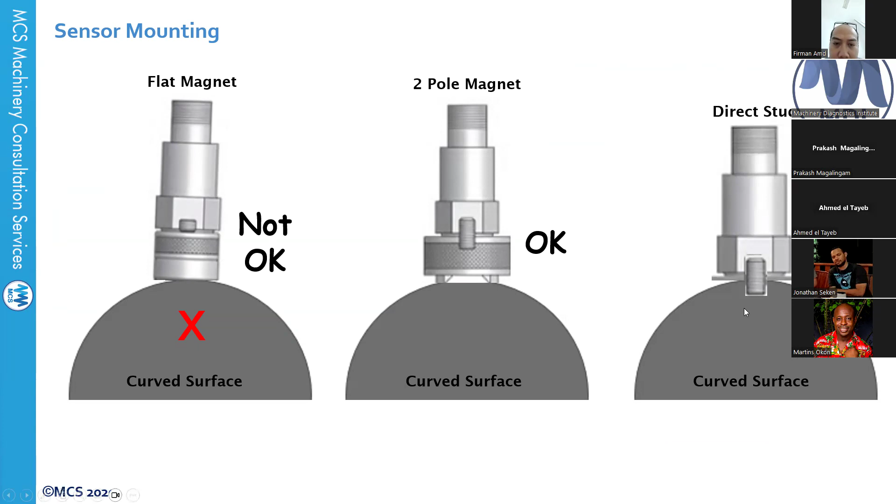Measurement frequency range: you can choose the frequency range for the measurement, like for shaft running speed, it could be up to 10 times the running speed. If you have a gearbox, you need to see 3 gear meshing frequencies. If you have rolling element bearings, calculate the inner race defect frequency and multiply this by 10. For pumps, 3 times the vane pass frequency; for motors, 3 times the twice line frequency; for fans, 3 times the blade pass frequency; and for sleeve bearings, 10 times the RPM.

We're going to talk about this more in detail next month when we start to talk about fault analysis. There are many causes for false signal, like faulty sensor, faulty cable. Very high vibration will cause sensor saturation, poor connection, some thermal transient and vibration transient, and you will see a ski slope in your vibration spectrum.

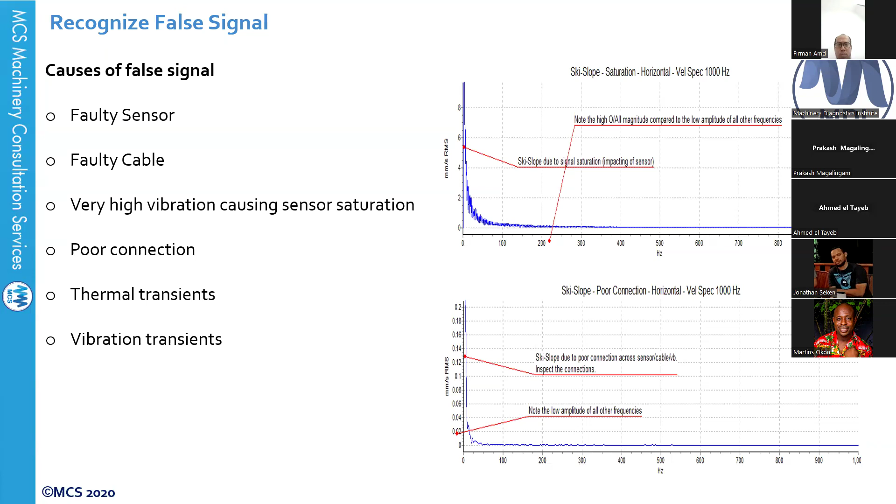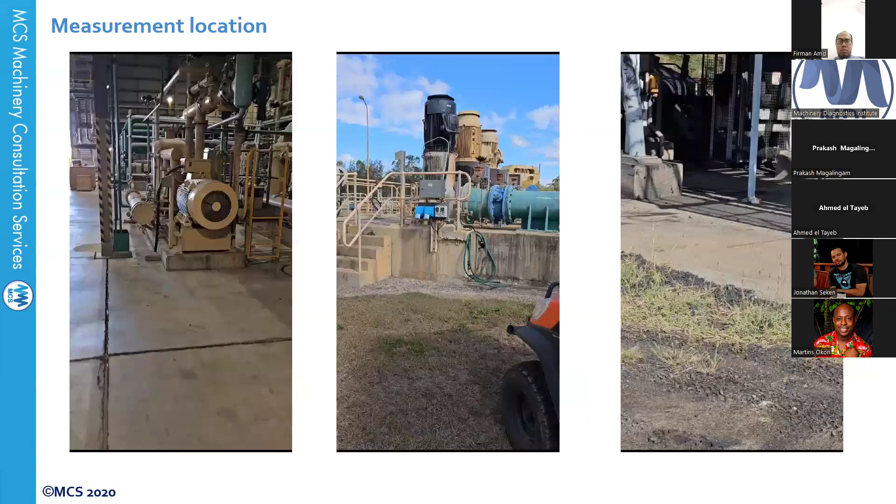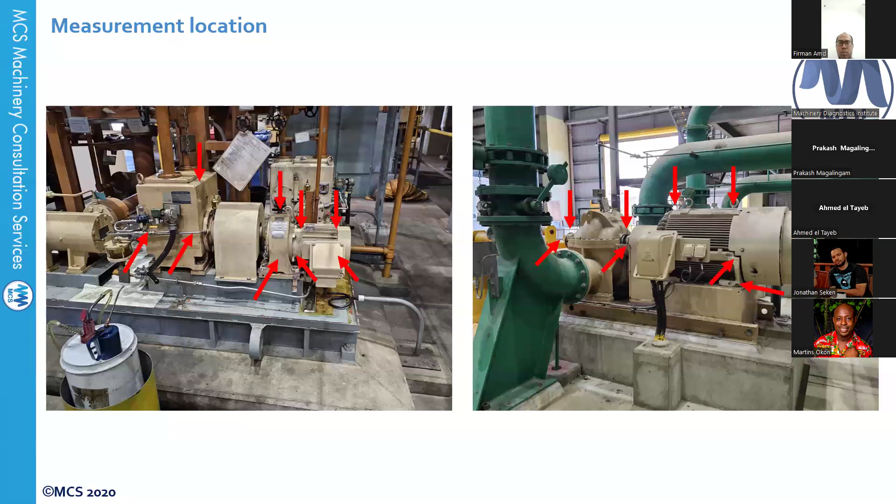I'm trying to make the sessions not too long because I know everyone is busy and people get bored easily, and I'm trying to make it more practical, that's why I put lots of photos. I know most of you who attended know what I'm talking about, but what we're really missing is to see many machines, to feel that what we're doing is more practical. That's what you're going to see in all the sessions, you'll see many photos, and we're going to talk about them in more detail about the situation, what is happening on site, and how to act when you see different situations in different machines.

In machines, these sensors are not always mounted. You mean the permanent sensor? Yes, the permanent sensor is not mounted at all the time. For routine data collection you should have your magnet. But permanent sensors are only used if the machine cannot be reached, like in a cooling tower or a high location you cannot reach. That's why we use the permanent sensor.